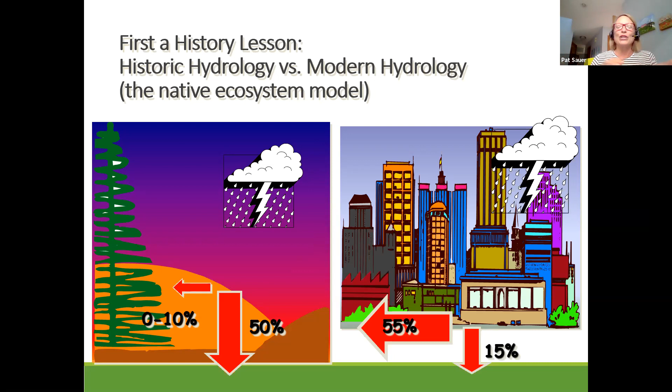Well, when we've paved over all the surfaces, added buildings, rooftops, streets, etc., water does not soak into those surfaces. So we've changed the hydrology, and in urban areas it is more runoff driven. Water is running off the street into the storm drain, into the underground storm sewer system, and out to the local stream. So water is getting to our streams faster, and along with it, it is carrying a lot of pollutants.

So this used to be what we were dealing with: the deep roots of the prairie, those soils had a lot of organic matter that were able to soak up a lot of water.

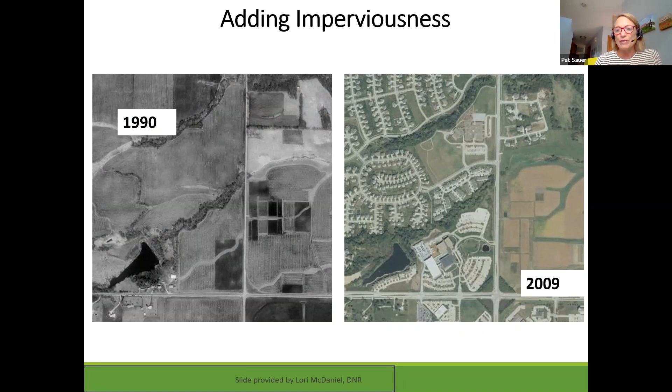Shown here is what's typical in suburban areas of Iowa, where at one time it was farmland, and now we have expanded and changed that landscape surface and added all of these impervious surfaces: rooftops, streets, roadways, etc.

The stormwater paradigm shift: in the past, in the 70s and 80s, it was collect, convey, get it out to the stream as fast as possible. As a result, we had a lot of localized flooding. Then it evolved into putting in big basins, detention and retention basins, to hold it back and release it more slowly.

Now what we're looking at in stormwater management is a combination of addressing water quality. Our impervious surfaces collect fertilizer residue, pet waste, bacteria, a whole host of pollutants. Let's remove those pollutants, then discharge to flood management, a wet detention, wet retention, or dry pond.

They're fed by groundwater, so it's cool and clear. But then when it rains, we're draining all the impervious surfaces, and we have this very unstable situation that impacts habitat. So we've got water quality issues you can see in urban areas, and we have the reality of flooding issues as well.

So how can we do things differently? Well, let's try and mimic that historic hydrology I was talking about. How can we do that? By using green stormwater infrastructure.

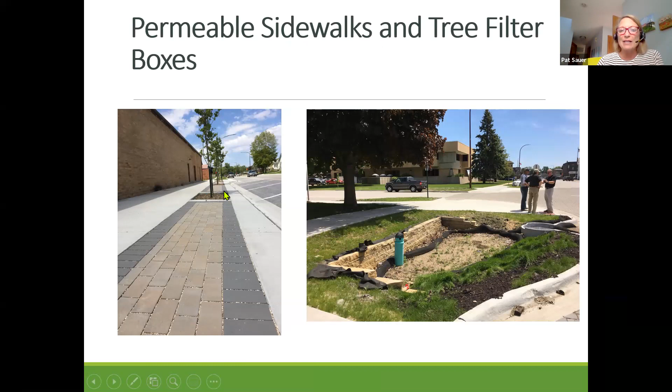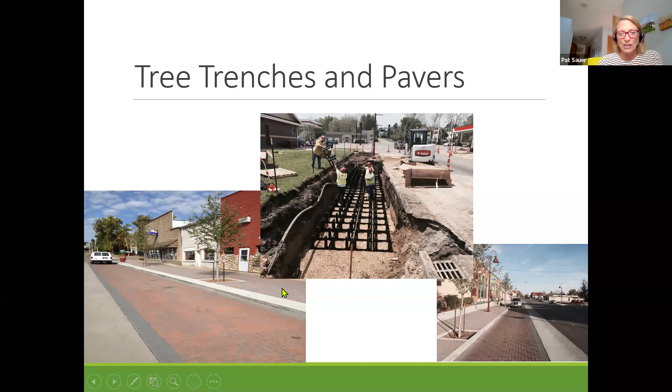This is a combination of using permeable pavers and tree filter boxes, again, that are like mini bioretention cells. And we have another type of system called a tree trench, where you have this plastic framework, you backfill with a permeable media, mainly sand, a little bit of compost and topsoil, and then you can put permeable pavers across the top, as you see here on the surface, planted to trees, and then the tree roots can spread out.

Different applications of permeable pavers in a parking lot. They come in many different colors these days. So you have these subsurface aggregate layers. In some cases, like the City of Ames, they're able to manage flood events - they have a deep enough aggregate layer that they can manage flood type events, and then also manage and clean up those smaller rainfall events, 1.25 inches or less.

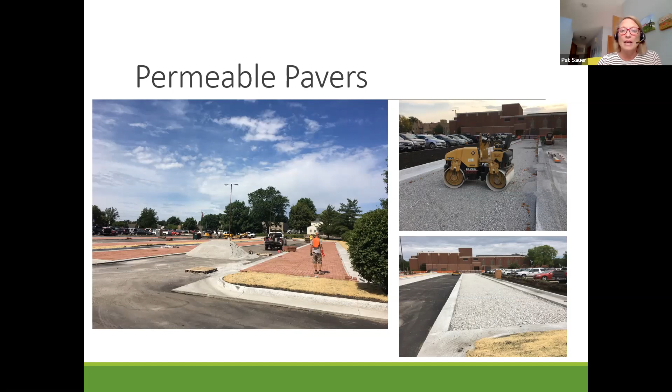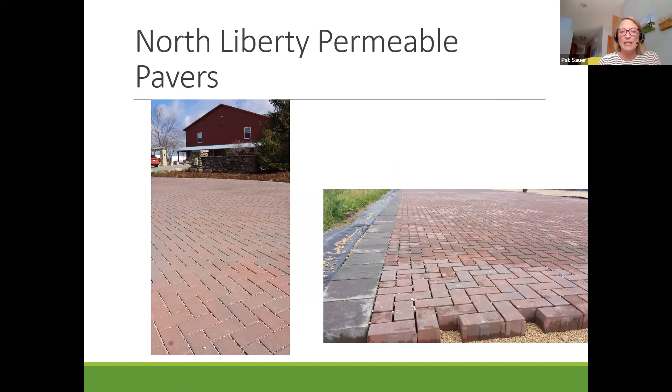You can pack the different bedding layers and then add the permeable pavers and a chip between the pavers. Not only concrete pavers, but we have clay pavers available as well. Another application at Country Landscapes in North Liberty, and Cedar Rapids Indian Creek Nature Center, who installed permeable pavers - right during a rainfall event, you don't see any ponding on that surface.

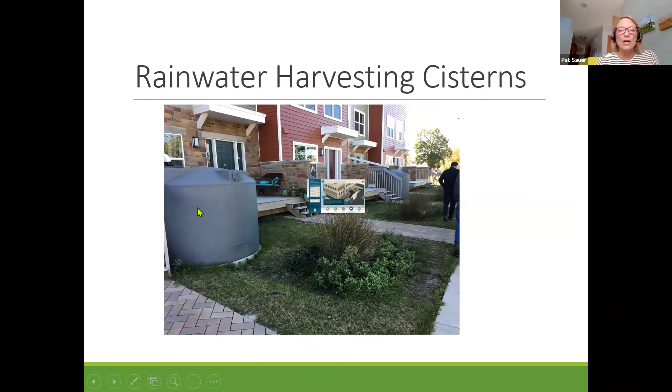Rainwater harvesting is also taking off in the state. This can be anywhere from a little rain barrel to larger cisterns, and actually even a much grander scale. We do have a company in Iowa, Tipton I believe it is, Xerxes - they make these large fiberglass cisterns that can be used subsurface.

One of the largest applications, or two of them that I'm aware of, is at the World Food Prize Hall in downtown Des Moines and at Wellmark in downtown Des Moines. They have subsurface cisterns, and they are using that water to flush toilets and urinals.

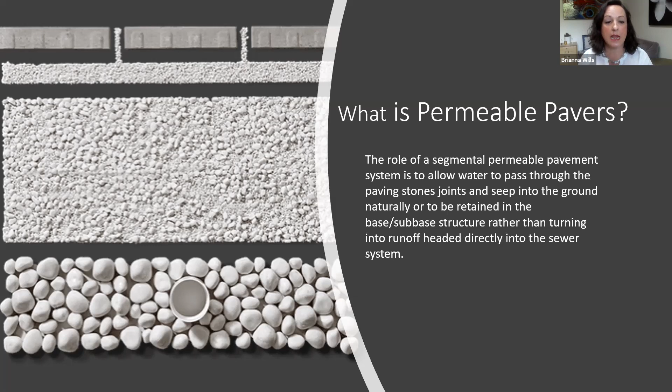Once we talked to the City of Iowa City engineers, we realized that the nearest stormwater connection we could use was actually almost a block away at the Ann Cleary walkway. If you know, we're at the corner, and Ann Cleary is kind of halfway down the block. So that was a huge challenge and obviously very expensive. So David Selmer came up with essentially creating a stormwater retention system using permeable pavers.

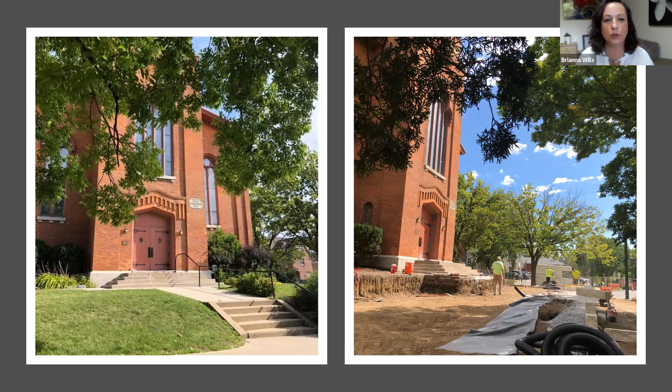We redirected all of that right into these water retention ponds. My next slide will show you a little bit. This is what it looks like after all of that construction, and that happened in 14 days. As you can see, it's essentially a permeable paver patio.

This was really an unexpected bonus to us, because not only were we able to implement best practices as far as wastewater management and really benefit climate action, we were actually able in the end to gain an additional space for our building. The patio is about 2,000 square feet of usable space, and since we do a lot of events here, this is really just a great addition to our historic building.

So we feel very fortunate to have come across a company that was able to help us implement something that was really environmentally forward, a really dramatic solution to our problem. I'm going to show you a really quick video of what the patio looks like. The darker spots are because it had rained that day, so the patio looks a little different, but those are just wet spots.

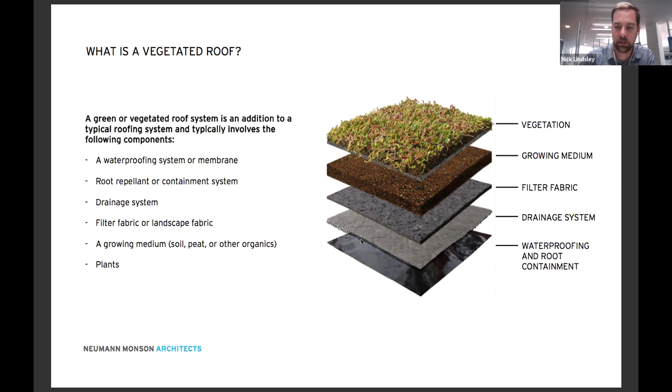There are three common types of green roofs: the first is extensive, next is semi-intensive, and third is intensive.

The weight is much lower and can typically go on most existing roof structures. It's also very suitable for steep slopes because of the thin soil—you can put it on a roof with up to a 25-degree slope. This gives more options if you already have an existing structure, without needing to rebuild any aspects of the building. Also, because of the types of plants used, often sedums that need very little water, there's a reduced need for irrigation and drainage.

But you do limit yourself on choice of plants. Sometimes you see these systems with wildflowers or grasses growing, but that's usually not included in the actual installed package—those are often seeds dropped by birds throughout the summer, and those taller grasses come and go with the seasons since they can't establish root structure in that fairly thin growing medium.

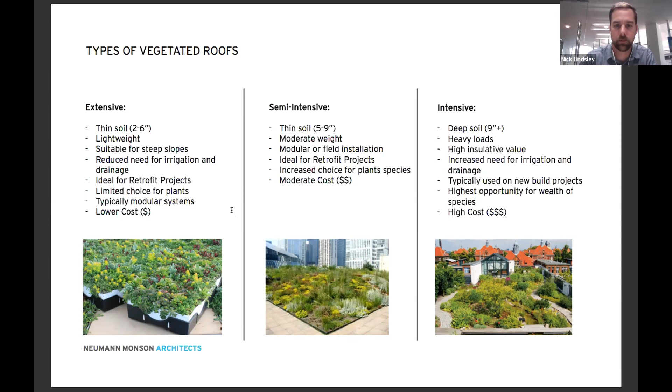The next is it helps with efficiency of your mechanical equipment. By putting these green roofs on top of your structures, it actually helps to lower the air temperature on the outside of the building, typically where you have your mechanical equipment. So the less work the equipment has to do to create a change in temperature between exterior and interior, especially in summer months, the better for the lifetime of the equipment, the better for the performance of your building and your energy bill.

Number 3, reduces greenhouse gas emissions. Like I just mentioned, the less your mechanical equipment has to work, the less energy you're going to be spending. So that alone is going to help you reduce emissions from the different building systems that keep your building warm and cool in the different seasons.

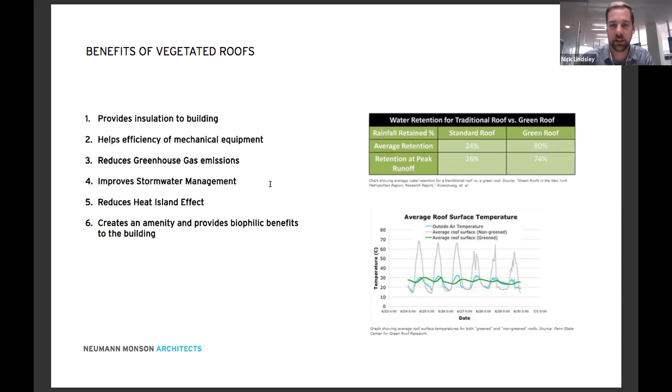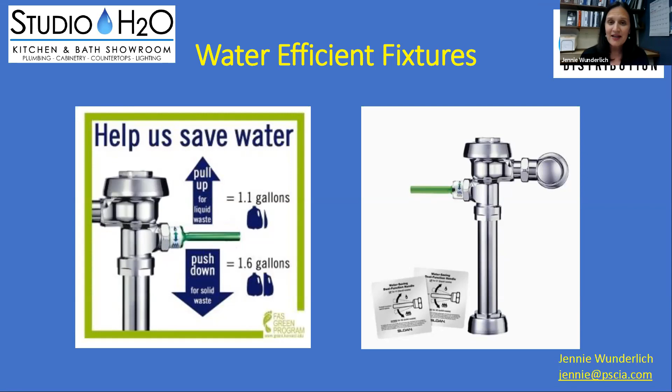This is not like the beautiful rooftop things Nick's talking about. This is like the down and dirty, but I tell you what, this saves water. This has a purpose. And sometimes we don't talk about them, we don't hit them, but I think it's something interesting to note that it can really make a difference over time, especially when you're trying to not only save money, but also save water.

And then here we go. There are cool looking toilets that save water that actually flush well. I don't know if you've had this before, but when my parents changed the toilet when low flow came out, quite a few years ago - I won't tell you when - when I came back from college, my folks had changed the toilet in my bathroom to a low flow and it did not work, right? It plugged all the time.

What had happened was they took what was 3.5 gallons per flush. If you think about that, what was the standard? It was 5 gallons. Now it was 3.5 gallons per flush. Well, what they did was they brought it down to 1.6, but they did not change the flushing technology. So can you imagine flushing 3.5 gallons and then flushing 1.6 with no change in how it's supposed to work? Yeah, issues, right? So they had issues.

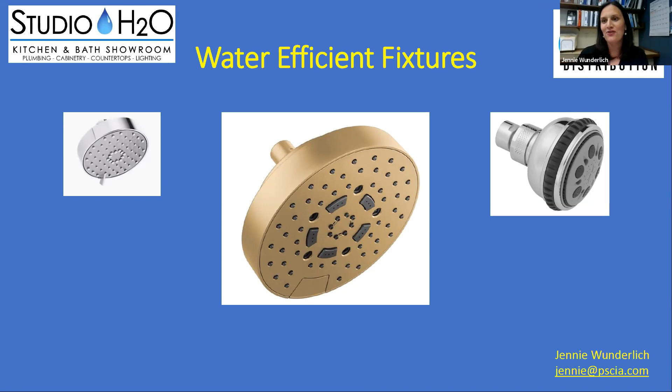So that was a super fast overview, I realize, but water savings is possible. You can go from that old toilet, good golly, all the way to newer, sleek. Either way, we can save water in all of our fixtures in different ways, in practical ways, and hope that you will be intrigued enough to check it out, or maybe switch out a shower head or a faucet or something like that to conserve our water around here and just keep making those improvements that help all of us.

Maybe you have friends in California or elsewhere that have even lower flow restrictions. You can say, oh man, I saw this. They can look cool, they can function well. Encourage them that it is possible when they're maybe complaining about having to go a little bit lower flow on their fixtures. So thanks for your time.